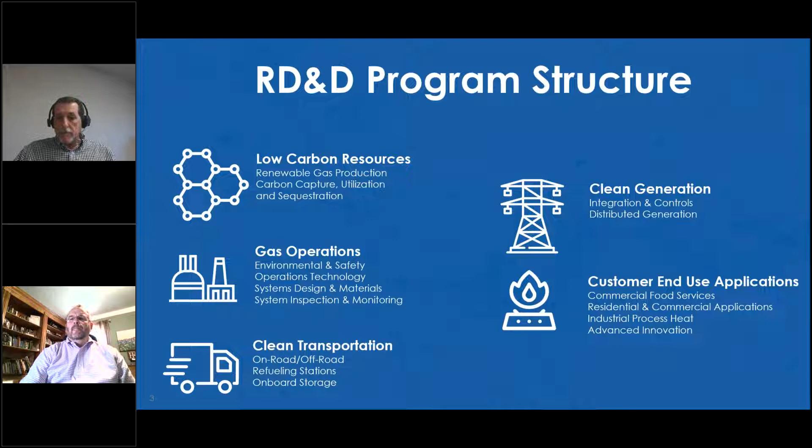I just wanted to make a couple comments about SoCalGas's commitment to diversity. SoCalGas is dedicated to improve the quality of life in the diverse communities that we serve. To support this commitment, SoCalGas R&D staff conducts outreach efforts and activities to engage with disadvantaged and underrepresented stakeholders within the communities throughout California. We notify researchers and entrepreneurs and businesses about RD&D program funding opportunities. We share the results from research projects to inform and educate the general public, and today's webinar is an example of one of the ways that we do this. And we track and report progress in diversity outreach efforts to our communities in our annual research report.

Our annual research report on the next slide is published annually, and you can find more details about the SoCalGas R&D program in our current year's report, our 2021 research activities, and that's also included in your handouts today, as well as a Spanish version of the research report to help connect with the diverse communities within our service territories. And next slide.

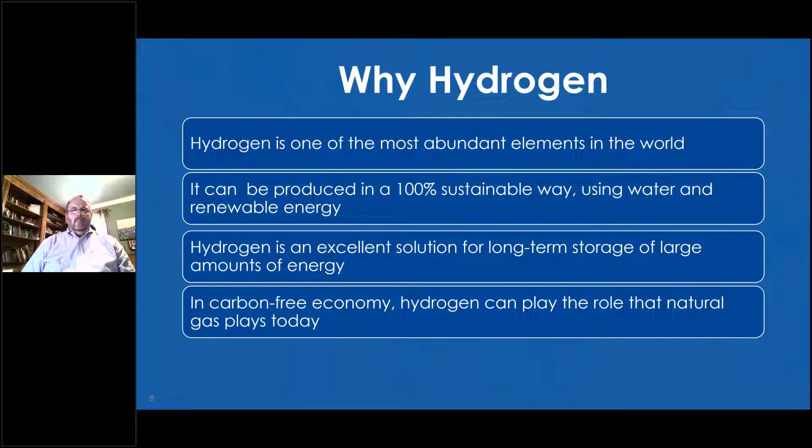So before I get into some of the details, one of the areas we're looking at for hydrogen is hydrogen blending into our existing system. And before we go into that effort, there's a lot of knowledge gaps that we're working through. We want to be focused on safety, system integrity, and system reliability. And it's really these knowledge gaps that lead us to work with a newly formed group in PRCI, which is Emerging Fuels Institute, and it's a common interest for the entire energy industry to fill these knowledge gaps and work together to resolve these as we move not just SoCalGas, but really the entire energy industry into this arena.

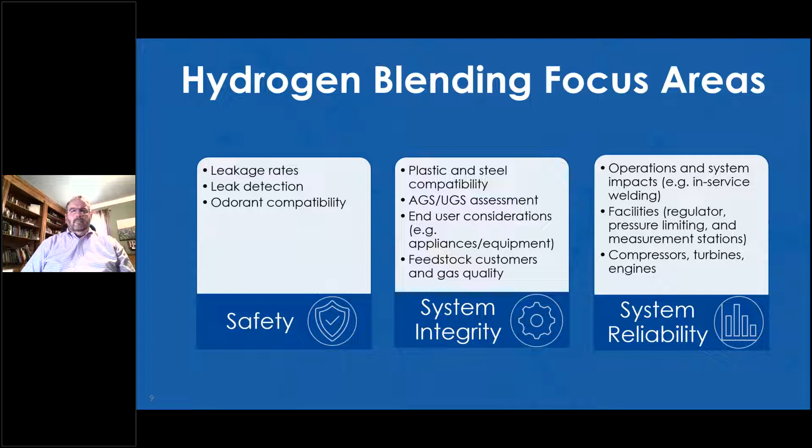So quick introduction of Cliff Johnson. Again, he is the president of Pipeline Research Council International. It's an organization that SoCalGas has been partnered with for several years. We partner on challenges within the industry and to help resolve those on the research side. And then more recently, Cliff has been the lead in developing an Emerging Fuels Institute, which is focused on several aspects of emerging fuels. Cliff joined PRCI 12 years ago as president, to continue to lead the organization in the research arena. Prior to that, he was at NACE as the Director of Public Affairs. And with that, I'll turn it over to Cliff.

Thanks, Hugo. Thanks for that great introduction. It's really an amazing time to be here, and there's a lot to think about in our space and how we want to do this and where we want to go exactly. When we think about where we are as an industry, we're at this unique crossroads. I call it the inflection point of the need to be able to service both the existing assets as well as the long-term future for the next fuels that we're going to be going through. So this is where we're trying to pull in today. It's really, where do we go and how do we do this, and the need to be able to do both of these clearly and sufficiently.

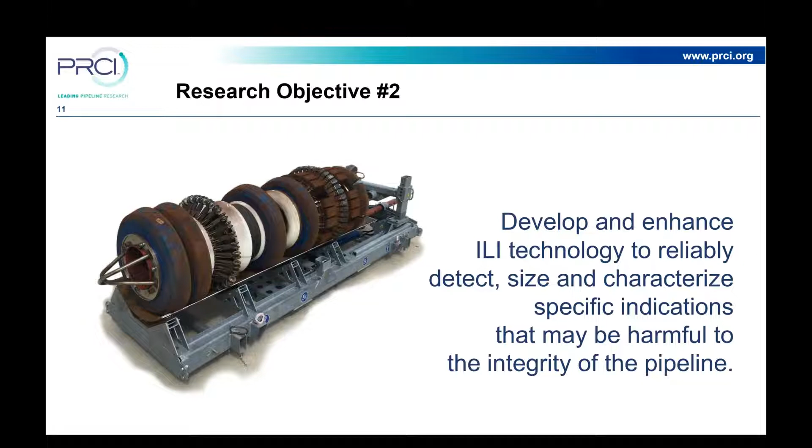It's not just the tools themselves that we need to improve. It's also the data analysis and the human factors, the people who read and run the tools, to make sure we do this effectively and efficiently. So this is really working on the inside of the pipe, running tools through.

Then we'll go back in, dig a hole, and bring in the NDE and say, validate, yes, there is a challenge here, or no, there isn't. And we need to make sure we understand what we're finding. So we need to make this tool get even stronger as we increase inline inspection. Again, it's not just a tool, it's the people and processes around it as well.

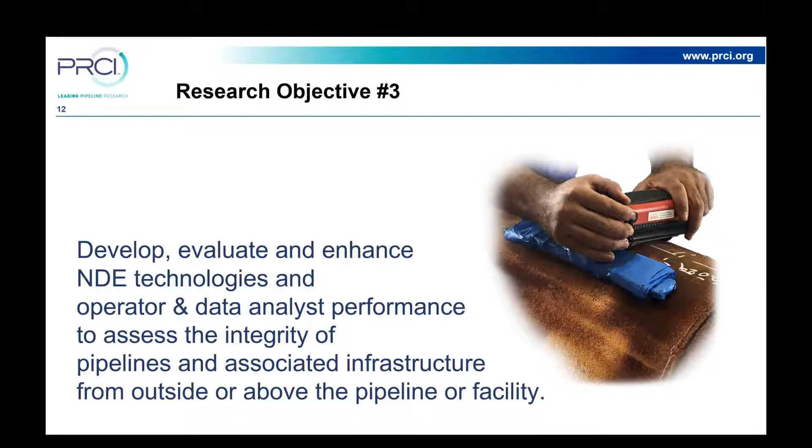The next thing we want to do is the fitness for service. I mentioned the vintage of our pipe. So we have some pipes in the ground from 100 years ago, some even older. Just a couple of summers ago, there was the pipe pulled out of Chicago from the 1850s, to be precise, that had been actively used since that period, that was being decommissioned to bring in a new, larger diameter system to push more product through.

And so we need to make sure, how do we validate the integrity of these very mature systems that are still vital? If we maintain steel properly, it can last for a very long time. But this is part of it here, that fitness for service. How do we know what we need to know for the integrity and the safety of our systems around the globe?

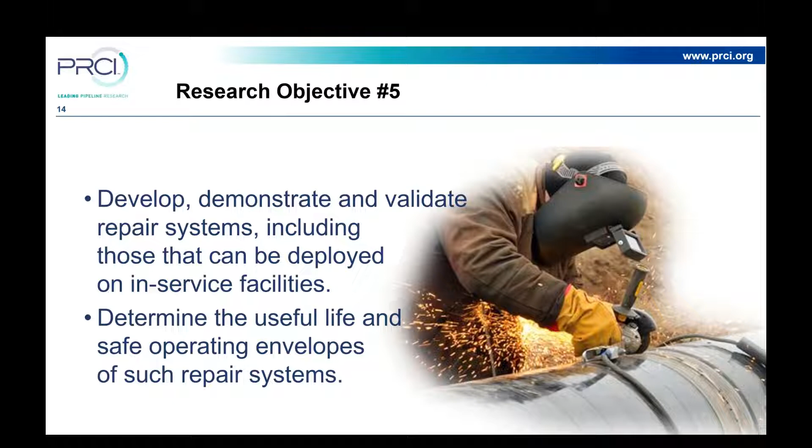The next area we want to begin looking at is really, how do we understand the repairs? We put in some key repairs into our process. We put in materials all around the steel to really shore up the defects that we find. When we shore up those defects, how do we know how long that integrity of the repair is going to last? And we've been doing a lot of studies in this space to validate how strong, how well these key tools work for us as useful repairs.

The next thing we want to really think about, and as I mentioned before, mechanical damage is part of this, is third-party detection. When there's something along the right-of-way that doesn't belong there, and as many of you may know, there's pipeline corridors. These are areas where the pipes are laid, and then there's a space around each of the pipeline areas that are corridors for the pipeline safety. How do we know, along those corridors, when there's an event where there's somebody who doesn't belong there that we need to be aware of?

As I mentioned before, it's very commonly construction. Someone's building a new community, a new development, a new road, and happens to encroach on this right-of-way. How do we know when they're there so we can make sure we align where the pipes are, so whenever there's construction being done, it doesn't interfere with those pipes, to create that safety barrier?

This is kind of unique. It's really multi-level, from ground-based inspection, how you do the sensors along the way, to aerial surveillance, using planes and unmanned vehicles to monitor those things, to even space, using satellites to really do time-over-time delivery.

What is the impact here? Not only is it third-party intrusion, but it's also the movement of the ground. There have been a number of instances, unfortunately, mostly in recent times, with ground movement, so earthquakes, mudslides that have impacted the pipeline systems. How do you know what's going on there? How do you do those inspections? So we're looking at third-party detection and geohazard ground movement for the future.

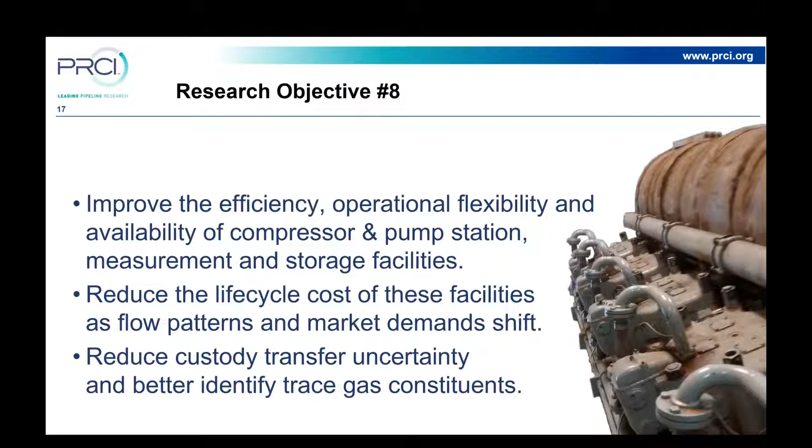And then finally, I mentioned before the need to understand the vintage pipelines and their fitness for service. Even with newer pipe, we have to make sure we're putting in the steels and the processes that we need today to have the longevity that we plan for and need in these systems, to have 50, 60, 75-year lives. So as we put them in, how do we make sure we get the right materials up front and the processes to follow through?

I mentioned research priorities earlier. The three that we talked about before were mechanical damage, crack management, and greenhouse gas emissions reductions. We also have a handful that we're beginning to explore for the next round of SRPs. We'll be meeting with our executive assembly in September to talk about which of these we should continue to advance. Looking at geohazards, as I mentioned before, ground movement and its impact on pipelines. Leak detection, making sure we find it before it becomes injurious.

Pipeline of things is kind of a silly name, but what we're really looking to do, again, is that data story. Can we bring in all the data that we have to continue to drive and advance our industry? The human performance. There is a component of all of this that is the human factors, when you look at what roles humans play and how the personnel around the pipes have such a critical role. These aren't automated procedures at this point. We still have a very high human touch, which is great. We just need to make sure we can continue to advance them and train them in a way that we continue to challenge ourselves and advance our industry.

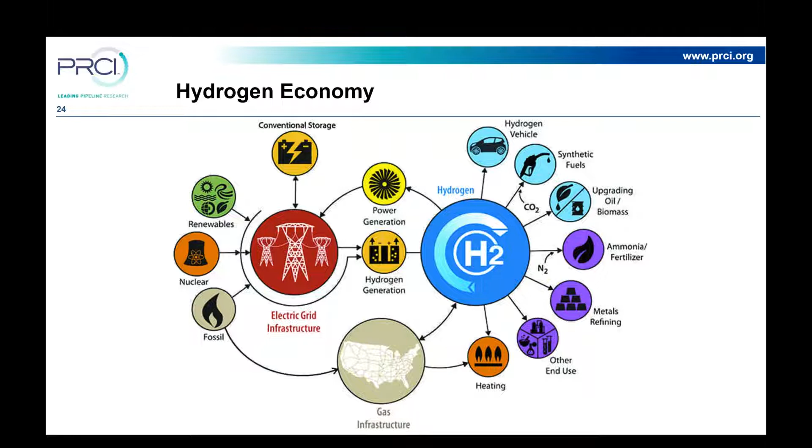But this is what you want to think about. There are other ways of transporting it. But if you want to think about safety and integrity, the best way is still by pipelines across our United States and around the world, to be honest with you. Kind of the next fuel, hydrogen, you can see this pivot point of how critical it can be and the many functions that it can play, from transportation to heavy industrial, and even to personal home use, is how we can even see this move into the future.

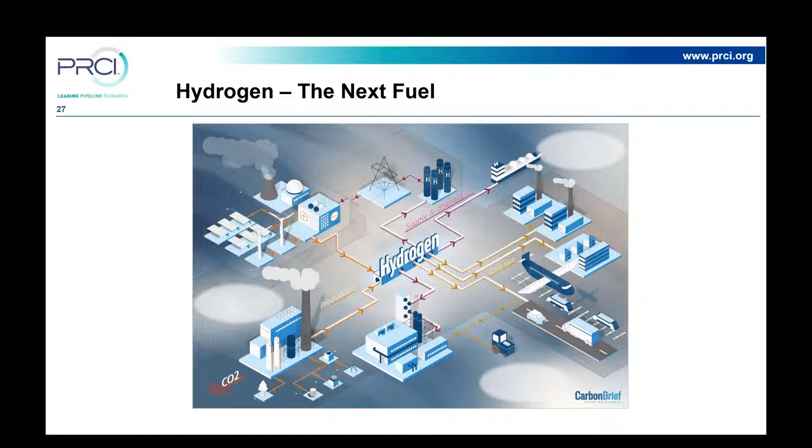When PRCI established our environmental commitment, there were 4 components to it. One is the greenhouse gas SRP. Two is really creating the EFI, which goes into the transport and storage of the emerging fuels. So the emerging fuels fits there. We then had to think about and just recently created the CO2 Task Force, which I'll talk about a little bit later, which is a byproduct of some of the emerging fuels activities. And then the advanced leak detection. So these 4 weave together to really help PRCI and our members to push for a low carbon, low emissions future. And this is something that we think is critically important for us.

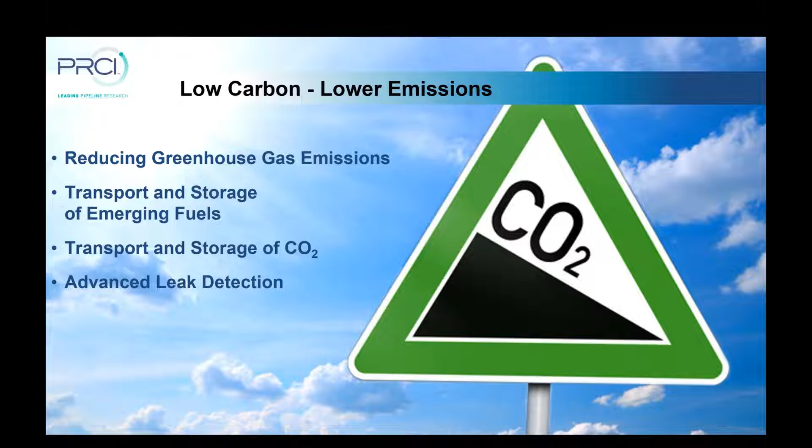I know here in California, there is a strong push between SoCal and PG&E and the University of California to put in for and support the Department of Energy's hydrogen hub, possibly in California, which is a great big step forward, where the EFI is trying to figure out the best way to interface and support that. It'll be a key part of our story as well.

PRCI has also set up a government collaboration focus on this. Last summer, we began a series of webinars and conversations and continued on this year with key organizations who will have oversight and regulatory push in this area and research, looking at the U.S. Department of Transportation's Pipeline and Hazardous Materials Safety Administration. This is currently the body that oversees pipelines in the United States for hydrocarbon transport, and more likely is going to oversee the hydrogen aspect as well. So we wanted to bring them into the conversation last year.

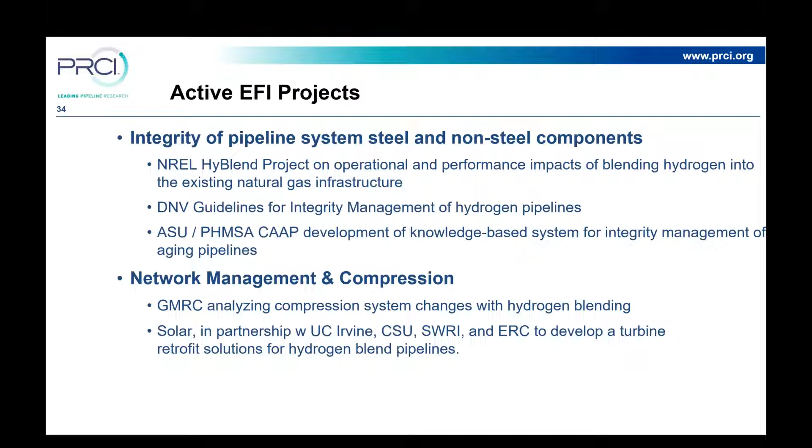PRCI and PHMSA have done a lot of work together jointly on the core program, looking at the base traditional hydrocarbons. And now we want to help transition that research portfolio together into the hydrogen space as well. And this is what we're working on there. When you look at some of these things here, it's not only the pipes, but also the facilities, looking at the medium and the gas quality.

Hydrogen's been the focus of my conversation so far, but the next opportunity could also be renewable natural gas. This is biomethane, brought in from different sources really close by. And this would be a different kind of process because biomethane is probably going to be a local opportunity. But from a pipeline operator's point of view, your biggest challenge is what kind of constituents are coming into your system. So gas quality is the driver there.

And we've been excitedly working with the Gas Technology Institute, GTI, on a database they created many years ago that we're now expanding with this hydrogen and renewable natural gas focus on the constituents. And so we hope to have that database sometime later this year or the first part of next, so that we can share with the industry as a whole what we are doing and where we are going. So it's very, very exciting to see how this is coming together.

We're also currently working, as active projects, with the Department of Energy on a small scale test on the impacts of hydrogen on piping. This is the first-blush test in the US to understand what it is going to mean when we put hydrogen with these steels that we've been using for so long, and what's the impact. Most professionals in the oil and gas industry will tell you they spent their entire career actively working to keep hydrogen out. Hydrogen and steel don't work well together. They create a thing called hydrogen embrittlement. We know how to go after it, and we have kept it out because the easiest way to mitigate it is to keep it out.

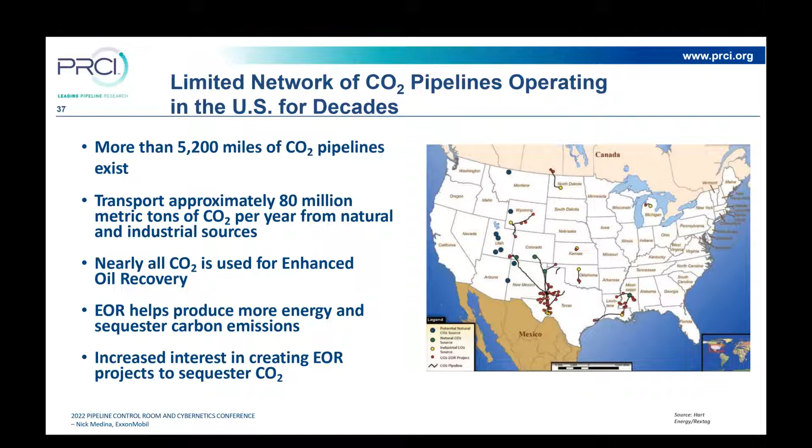What we've been doing historically will probably work to some degree, but there are going to be additional needs as well. So we created the CO2 Task Force this past fall. It's really a partnership between PRCI, the American Petroleum Institute, and the Association of Oil Pipelines, to begin driving how we look at and explore what is needed for CO2.

The leaders for this task force have stepped up as Rick Norker from ExxonMobil, Wim Geert with Shell, and Clay Atwood out of Williams. So these three companies have identified this as an opportunity, one more thing to help with this climate change conversation and to really commit to that.

We are closely working, as I mentioned before, on the other parts of the program, hydrogen and the core research. Also here, we're working with PHMSA on their recent research announcement on what can we do. Can we partner with them again? Hope to find out next month about getting that forward. If you wanted some more information about what we're doing and where we're going with this task force, reach out to myself or Tom Marlowe on our staff, and Tom will be able to walk you through what's being done there as well.

But this is kind of a sister component to what we're doing in the EFI, because with the EFI, there will be some opportunities to think about the CO2 because of the type of hydrogen that could be produced. And also, as said before, to help mitigate some of the industrial production of CO2, this pipeline, this storage mentality is going to be critically important.

What I want to do for the next couple of minutes is talk about the technology development activities I mentioned before, and now here's the Technology Development Center. And so this is the base in Houston, as I mentioned before. We opened it in 2015, and really it began to show you what we could do and where the processes are. So we've got about 20,000 of workshop space, and another 9,000 of meeting space and offices, and about 8 acres of test facilities around the structure.

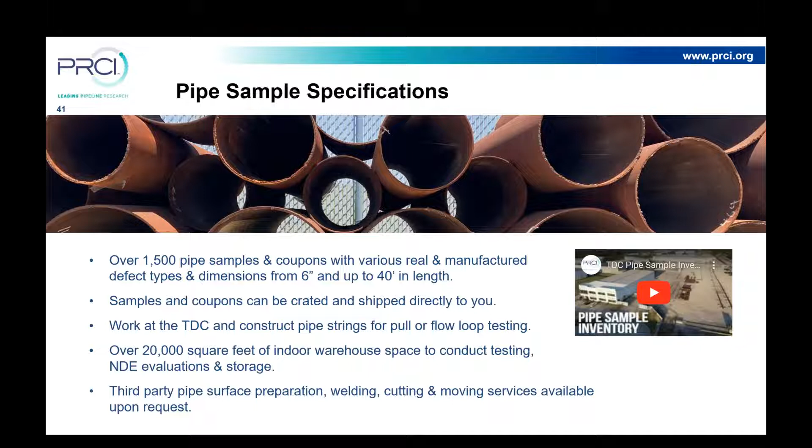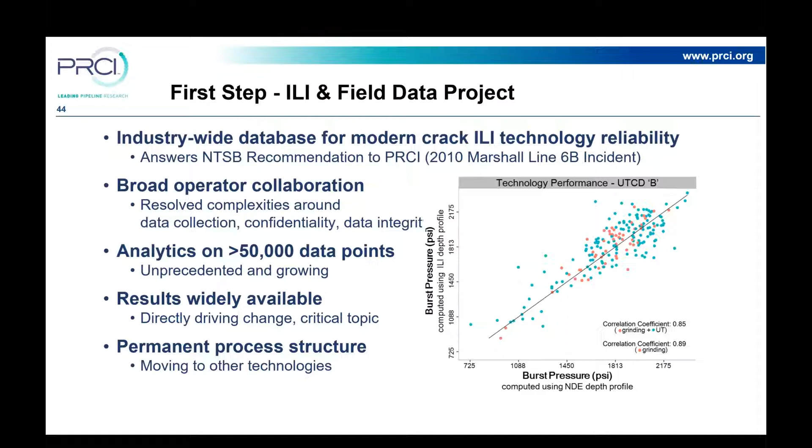So what did we learn is kind of the idea of how do we do data sharing and data learning. Our industry, the pipeline industry, has done a pretty good job of individual companies kind of working with their data. We haven't done a great job of industry-wide sharing of data to elevate the industry. And this was something that came out of those original research projects that showed as we bring together stuff across all the operators, the more rapidly we can change and enhance.

This is kind of a model that we've seen done very effectively in the aviation space and in the nuclear space. In both those areas, their federal agency gives them the chance to share information amongst the various operators to advance the industry as a whole. That's something that we have not done consistently as an industry, and something we want to spend more time on and begin to look into to see what we can do to build upon that.

Currently, we've created a structure on our website, the Virtual Technology Center. It's got two databases currently, one on pipe material properties, which I mentioned before as the core research objective number one. And so we now have a database of different samples and inventories. And so an operator can go in and say, I believe I have this information about my pipe. What do we need? What can I know about it? And this information database will begin showing it.

Also, we have ultrasonic test results, and this is a testing method for the facility side of how we do this and some of the validations and calibrations we need to do. And we have the test results to show how different parts of the tools perform and which ones to use when. We're about to embark on a new project on river crossings. These are right-of-ways where there's a river and the pipeline crosses beneath it.

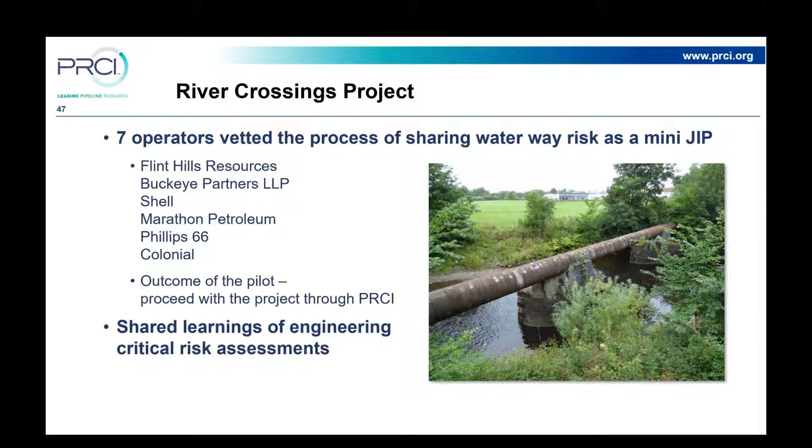So I've come to the end of the presentation and kind of wrapping it up, and I'd love to answer any questions you may have. And I see that the Q&A has been flashing as I've been talking. So I look forward to getting into those this afternoon. And so if there's some more questions, look forward to it.